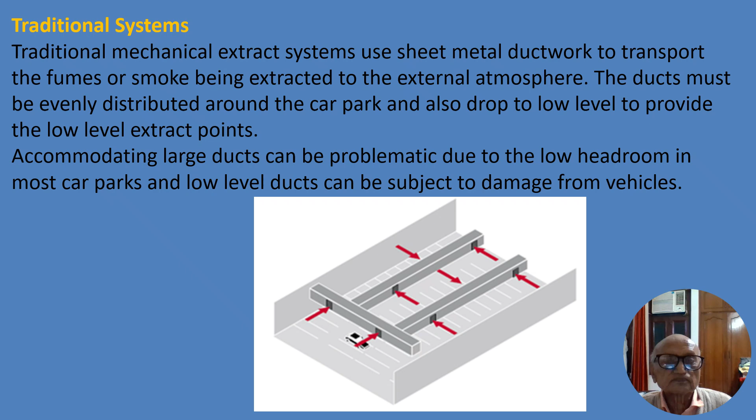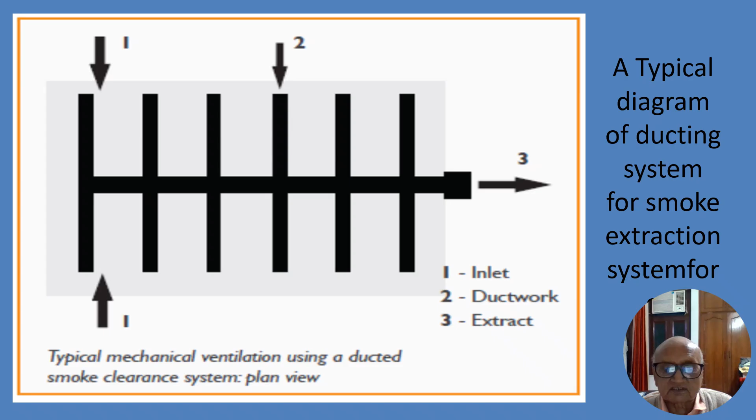Friends, this particular slide shows a typical diagram of ducting system for smoke extraction system for car park. Friends, we are discussing demerits of ducted smoke control system, that is the conventional smoke control system.

The main issues relating to ducted mechanical extract system which often cause problem for designers are: one, the ductwork runs underneath the ceiling, reducing the already restricted height normally available. Second, downstand beams require the ducting to be set down below them, thus diminishing the height even further.

Third, low level extract points are required, often needing protective barriers to surround them, and these take up valuable floor space also. This happens due to movement of cars. The fourth is the ductwork gives the car park a cluttered look and can interfere with the CCTV coverage and lighting arrangements.

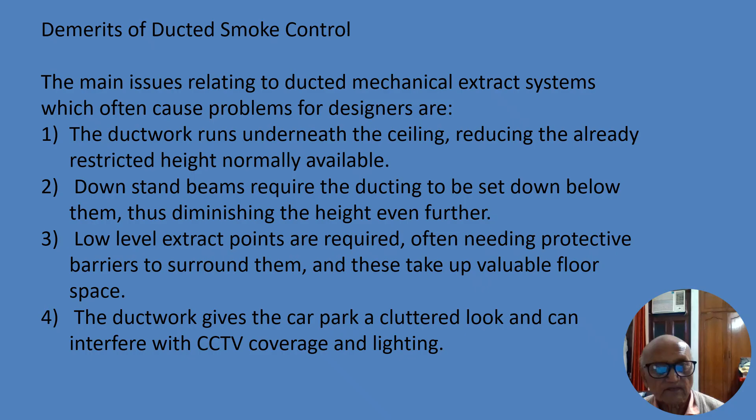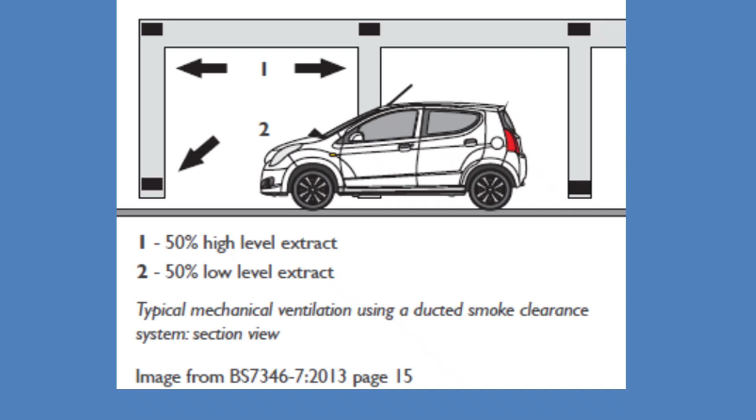Friends, this particular diagram shows sectional elevation of a mechanical ventilation system using a ducted smoke clearance system. In this, there are two different ways of collecting the smoke. One is 50% low level extract and another is 50% high level extract system.

Friends, apart from the conventional system, in 1990 to 2000 a different type of system was developed which now has two different versions. One version is known as jet fans. Other names for this are jet thrust, jet vent, or impulse fan. The other one is induction systems, induction fans. We'll discuss both these systems, jet fans and induction fans.

Jet fan, jet thrust, jet vent, or impulse fan are the names of the same basic system developed for car parking in Britain and then further developed in the Netherlands. Jet systems originated around the 1990 to 2000 period and have become increasingly popular as they can overcome many of the problems associated with the sheet metal ductwork.

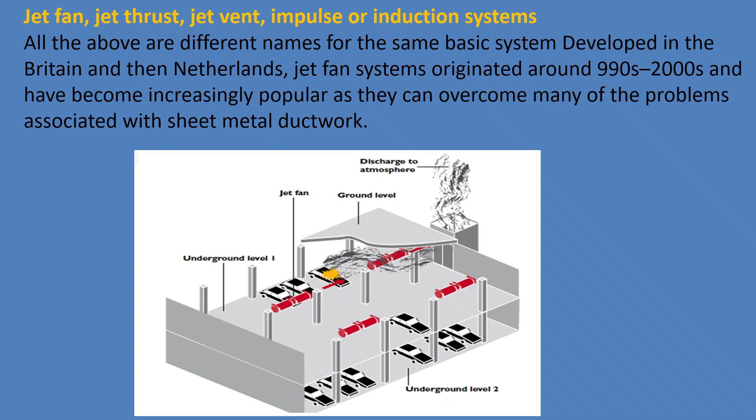The discharge here should not be injurious to surroundings. So this system collects at different levels, lower level and upper level of two different floors. Smoke is collected and purged into atmosphere.

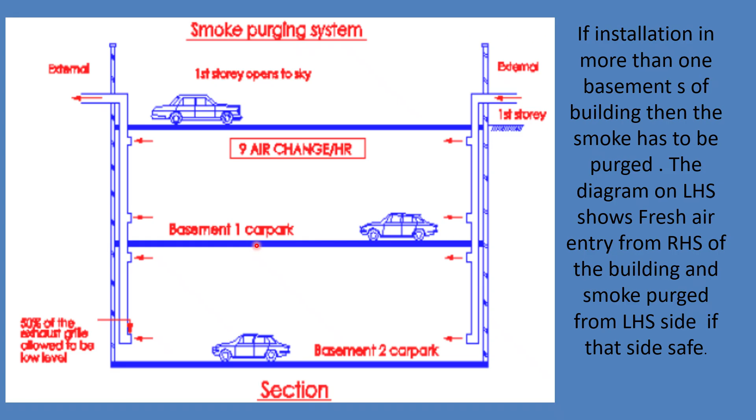The jet fans employed for smoke purging or smoke extraction can be of two different types: axial flow type, shown on the left hand side, and centrifugal or radial flow type on the right hand side. An axial flow fan is mounted within an inlet and outlet cylindrical silencer tested as a complete unit. Jet fans can provide up to 50 newtons of thrust, suitable for most small to medium sized car park fans.

In axial impeller, the air enters axially. It enters like this axially and gets discharged also axially. Whereas in the centrifugal impeller, it enters axially and gets discharged radially, that is in centrifugal system here.

A centrifugal with radial impeller fan, with an air inlet positioned beneath the body of the fan and discharging through a reduced size opening. Induction fan can provide up to 100 Newton of thrust.

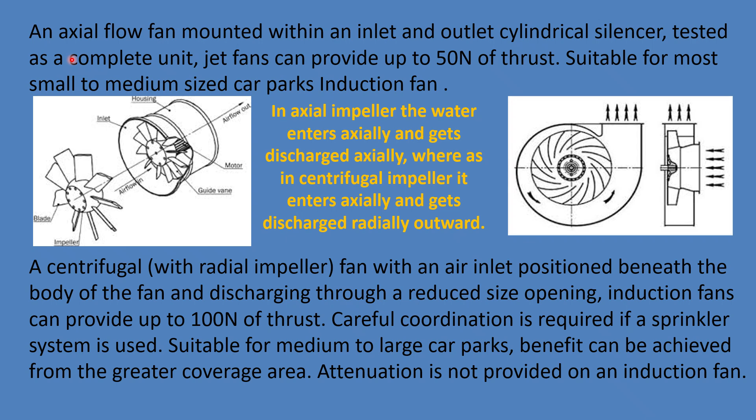Careful coordination is required if a sprinkler is used, suitable for medium to large car park. Benefit can be achieved from the greater coverage area. Attenuation is not provided on induction fan. Friend, remember we are discussing induction fans here.

On the left hand side of this pictorial diagram, I have shown a jet fan of average size. This size may be 1 to 2 meters and diameter can be from 355 mm to 600 mm as detailed in the next slide. This can generate up to 80 Newton of thrust in different sizes. The average size can go up to 50 newtons.

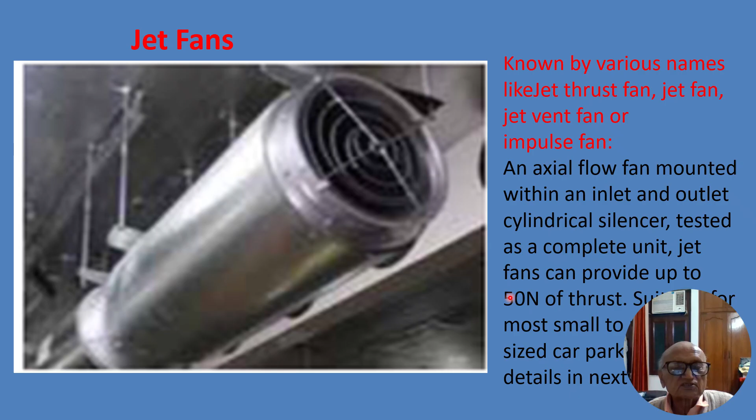Friends, as discussed previously, there are three types of smoke extraction systems, of which one is conventional, the second one is induction type. Induction type we'll discuss a little later, whereas we are currently discussing the third type known as jet fan

or impulse fan. They can vary in diameter from 300 mm to 600 mm, and their length can vary from 700 to 900 mm in case of the lowest diameter size to 1500 to 1800 mm in case of the largest size. And the thrust produced varies from 15 to 80 to 120 newtons.

Use-wise, the smallest fan is used in small basements with low ceiling and CO control. The other size, 355 mm, is used for medium parking areas. 400 is the standard enclosed car park. 450 mm is smoke control in large basements. 500 is large spans, high smoke load.

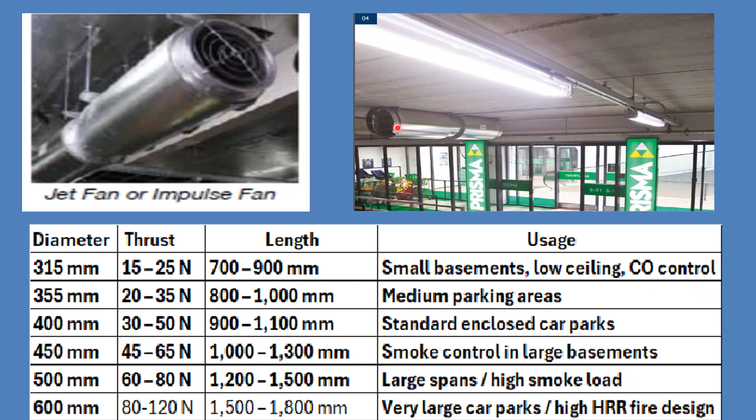And the biggest size is used for very large car park in high HRR fire design. So remember, on the top, this cylindrical jet fan is shown here. In another diagram on the right hand side, it is shown here.

Friends, now we will tell you how the jet fan works. Jet fan for smoke extraction. Jet fans were developed for ventilating tunnels and work by propelling a small jet of air at extremely high velocity, which causes surrounding air to be entrained, and in confined spaces like a tunnel or car park can be used to move a large volume of gas.

The jet fans were developed for tunnel ventilation in Switzerland first, and then for car parks they were developed in Britain and other countries later on. In car park, jet fans are used to replace the ductwork and to drive the fumes or smoke towards the extract fans to keep pollution within acceptable level and to clear smoke.

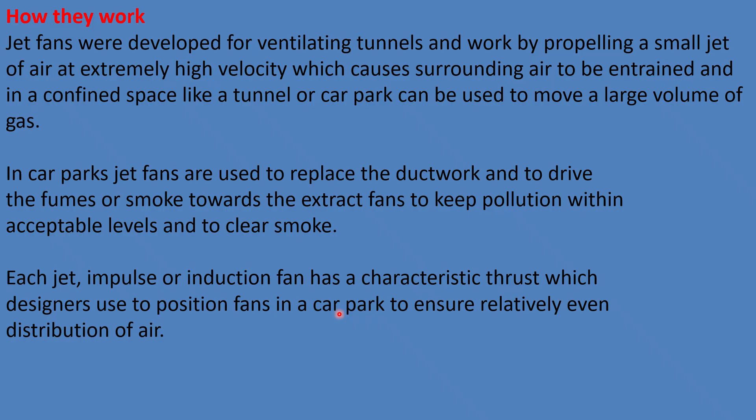Each jet, impulse or induction fan has a characteristic thrust which designers use to position fans in car park to ensure relatively even distribution of air. This thrust we have already discussed in the previous slides.

Dear friends, the impulse or jet ventilation system pushes the air through the car park towards a single extract point rather than pulling it to multiple extract points as a ducted mechanical extraction system may do. They provide greater flexibility and effectiveness.

Impulse ventilation systems comprise a series of fans located under the ceiling which generate thrust like a jet engine and add momentum to the air. Using a small fan at high velocity results in a large air movement at low velocity as the jet of air spreads out. A general air flow is created towards pre-designated extract points, moving smoke and fumes with it.

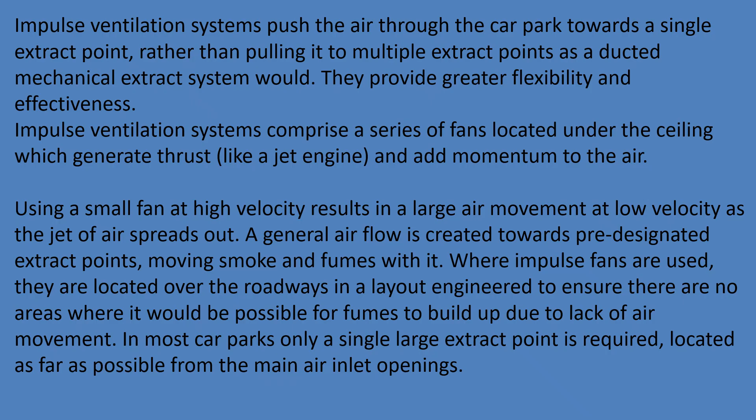Where impulse fans are used, they are located over the roadways in a layout engineered to ensure there is no area where it would be possible for fumes to build up due to lack of air movement. In most car parks, a single extract point is required, located as far as possible from the main air inlet opening.

Friends, we were discussing the working of jet or impulse type of system for extracting smoke. This system requires an addressable fire detection system also, so that the site of the fire can be pinpointed and the system starts working from that particular point.

A control system then starts only the selected impulse and extract fans to control the direction of the smoke and provide clear air in the designated part of the car park. The number and location of fans are carefully chosen to match the system design requirements and to ensure that there are no dead spots for fumes and smoke to stagnate and collect.

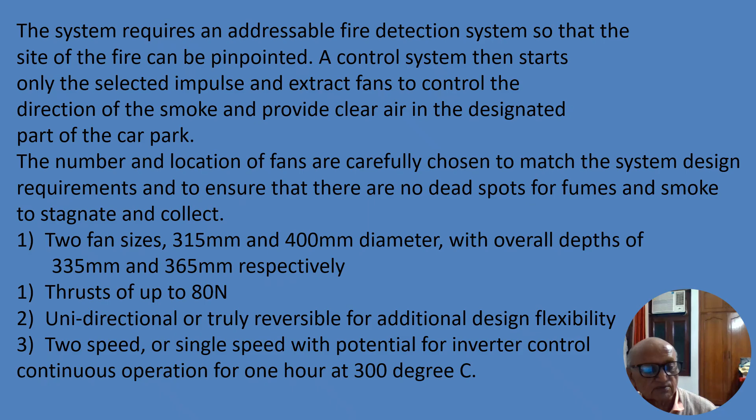The first two fan sizes are available, 315 and 400 mm diameter with an overall depth of 335 mm and 365 mm respectively. The thrust generated is up to 80 newtons. Third point is unidirectional or truly reversible for additional design flexibility. Fourth, two speed or single speed with potential for inverter control, continuous operation for 1 hour at 300 degrees Celsius.

Friends, at last we are discussing induction or cyclone type fan systems. These systems have come a little later than the earlier jet or impulse type of fans. Cyclone type reduces the level of polluted air during day-to-day use and assists with the extraction of smoke in the event of fire, directing polluted air and smoke towards the extract positions in a car park or underground service area.

Using the same principle as impulse ventilators, induction fans are slimmer and potentially more powerful, thus reducing the number of units required. Impulse fans are generally limited to a thrust of about 50 newtons as they otherwise become physically too large for the constricted space available in the car park. Induction fans have thrust up to around 100 newtons. The floor area ventilated per fan is thus significantly greater, equating to a requirement of fewer units. However, in contrast to impulse fans, induction fans cannot generally be made reversible.

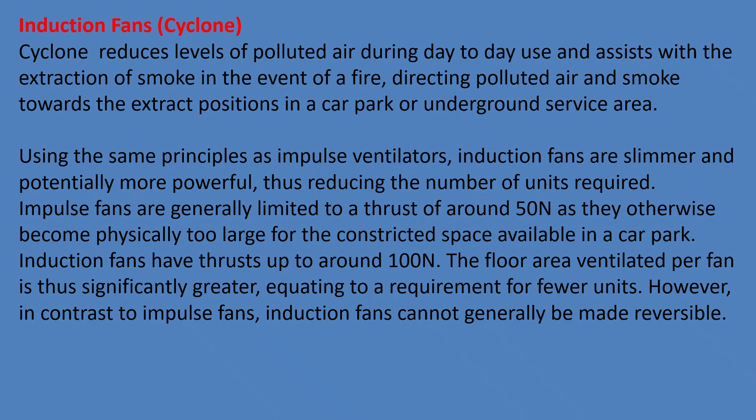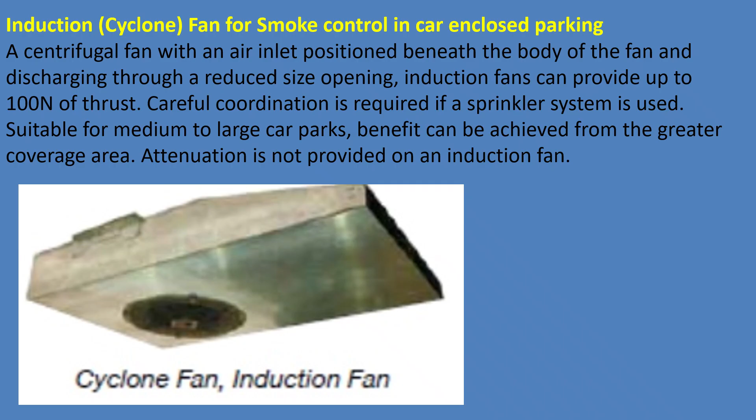The bottom portion of this slide shows a cyclone fan, or induction fan as it is more popularly known. A centrifugal fan with an air inlet positioned beneath the body of the fan and discharging through a reduced sized opening. Induction fan can provide up to 100 newtons of thrust. Careful coordination is required if a sprinkler system is used. Suitable for medium to large car parks, benefit can be achieved from the greater coverage area. Attenuation is not provided on an induction system.

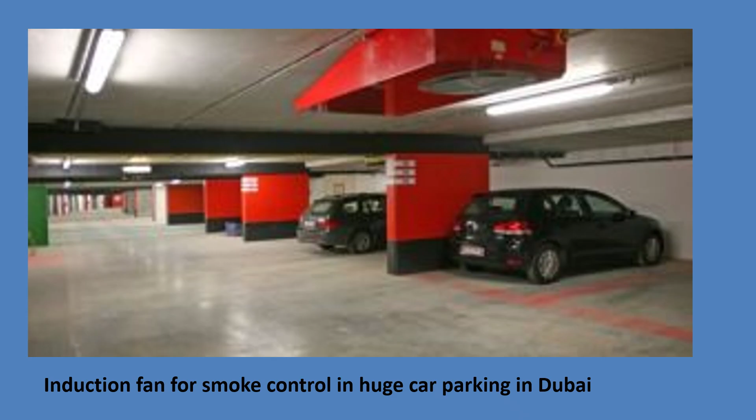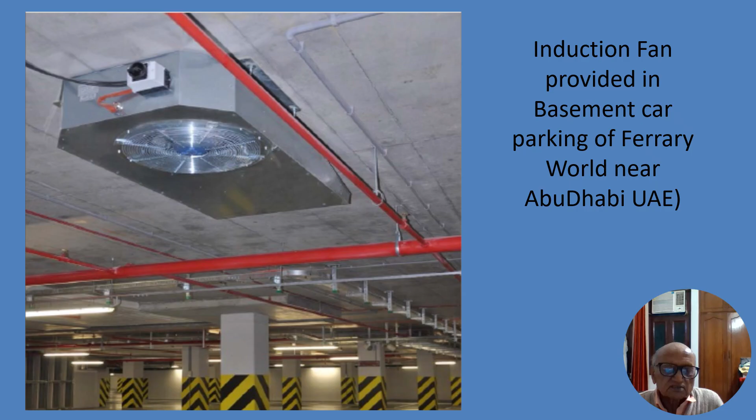This photograph I have taken somewhere in a Dubai car parking system. In Dubai, very large car parking systems exist. The picture on the left hand side of this slide shows an induction fan provided in the basement car parking of Ferrari World near Abu Dhabi, UAE. It is about 30 kilometers away. I've seen this system. I've personally gone there and seen this system.

Impulse fans are generally limited to a thrust of around 50 newtons as they otherwise become physically too large for the constricted space available in a car park. Induction fans have thrust up to around 100 newtons. The floor area ventilated per fan is thus significantly greater, equating to a requirement of fewer units. However, in contrast to impulse fans, induction fans cannot generally be made reversible. There are some more advantages in space saving benefit.